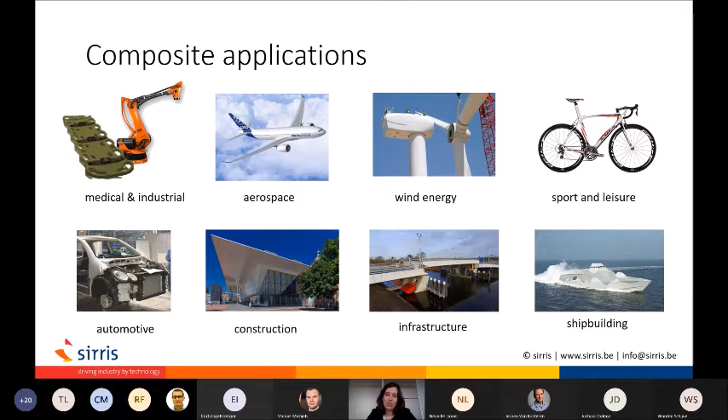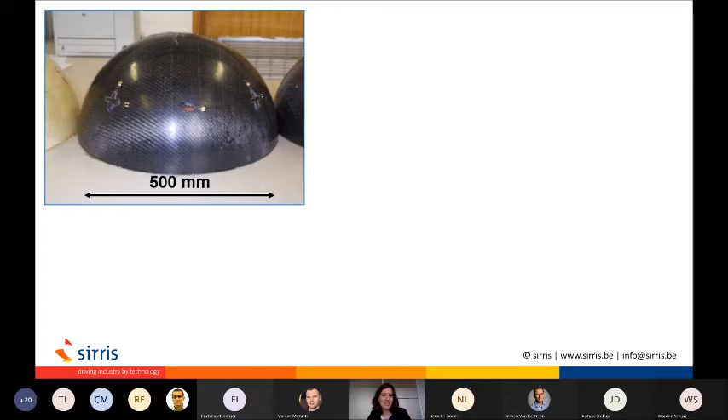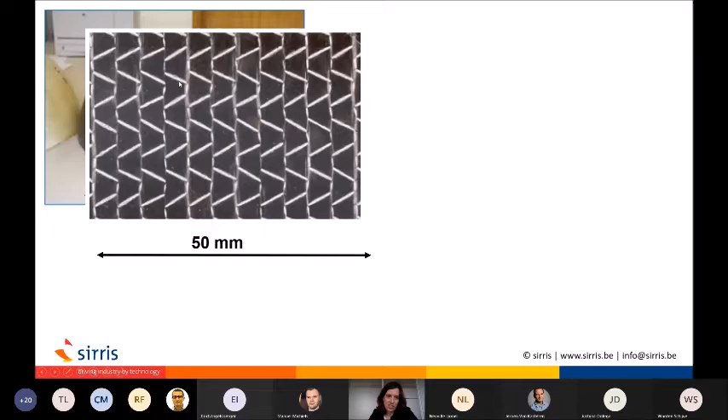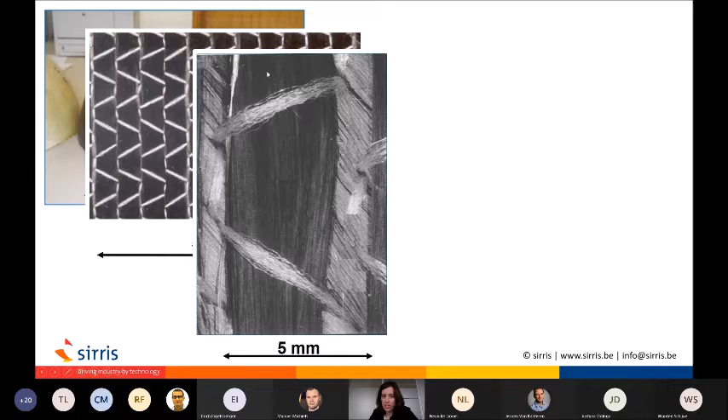Today we want to talk about how these products are made. To explain that a bit more, I want to show a composite to make sure we're all on the same page about what a composite is. This is a composite product. When we zoom in, we have reinforcing fibers - in this case carbon fiber - held together with a stitch. Zooming in even more, we see the carbon fiber again held together with stitching, just to keep it together and make sure the fibers are well aligned. So all the structural load is carried by the unidirectional carbon in this case.

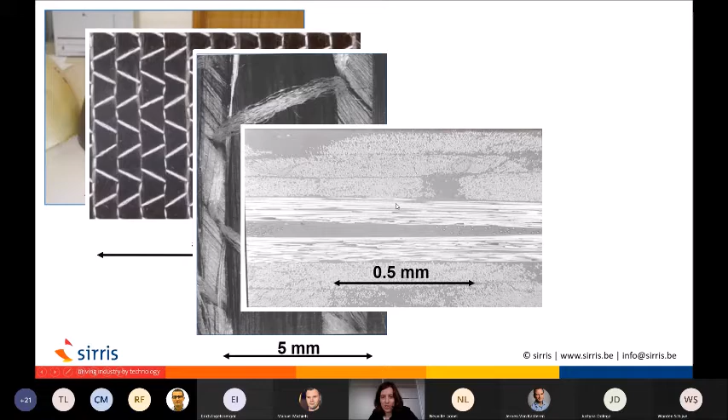When you cut the composite and look at the cross section, you see all the fibers - these appear as circles because we're looking at cross sections. You can see fiber bundles in several directions: this fiber is at 90 degrees on the screen, and this one is along the screen surface, so this is a zero-degree direction fiber.

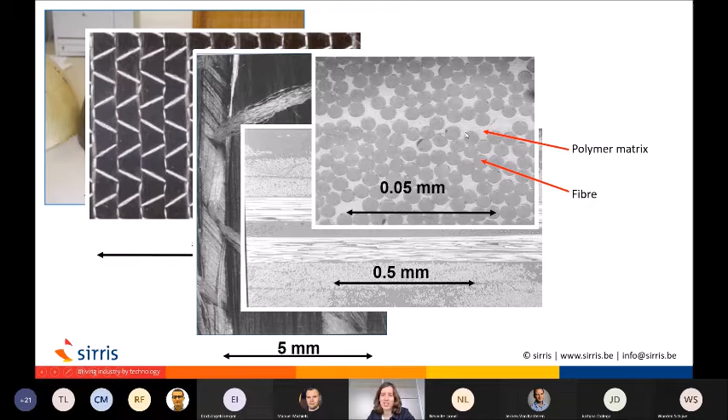But basically, when we talk about composites, we're talking about a blend of a polymer, which needs to be very close to the fiber, with no porosity next to it. This is very important when we start talking about manufacturing. The quality of a composite is mainly driven by the amount of impregnation of the fiber - meaning we don't want any porosity inside the composite. We want the polymer to be very much around the fiber so we can have good load transfer between the fiber and the polymer, and between fibers. That is our goal - to manufacture good composites. How do we do that?

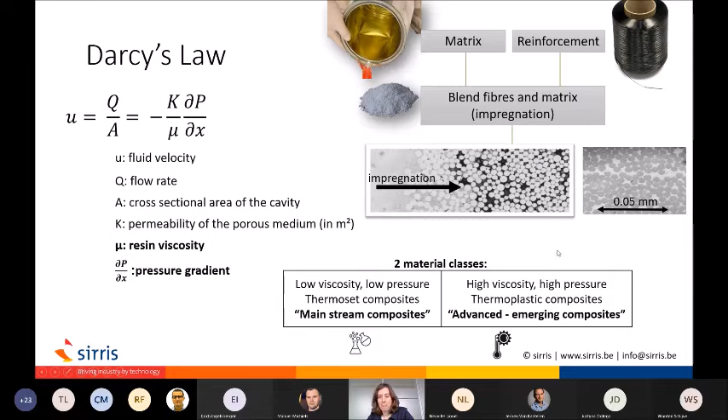When we look at what is happening today, we see more and more advanced composites where you have high viscosity, high pressure. You also need high temperature for these kind of processes. So it's good to keep this in mind as I go further.

We have material classes within composites: thermosets, where we have very fluid resins. We have an initial very low viscosity. During processing, this viscosity will rise in order to get a rigid structure. But initially we need low, mostly low, pressure, though there are also processes with higher pressures.

Curing needs time. That is one of the main drawbacks of thermosets. Once it's impregnated, you still need time for the chemical reaction to go forward. But once the material is fixed, you cannot post-shape it, so that's a drawback. It's also relatively brittle, and these drawbacks lead to more interest in thermoplastic processing at the moment.

It's more difficult to process, but the products in general have very nice opportunities that a thermoset composite doesn't have. I mainly talk about fast processing - you can process this material very fastly if you have the right pressures. Of course, it's a bit more challenging, but you can go to fast processing.

This is why thermoplastics are very much used in automotive industry today. You can also, after your part is made, weld it again. You can assemble parts quite easily - technologies are emerging for that. And the material is typically tougher. This is also very interesting for many applications.

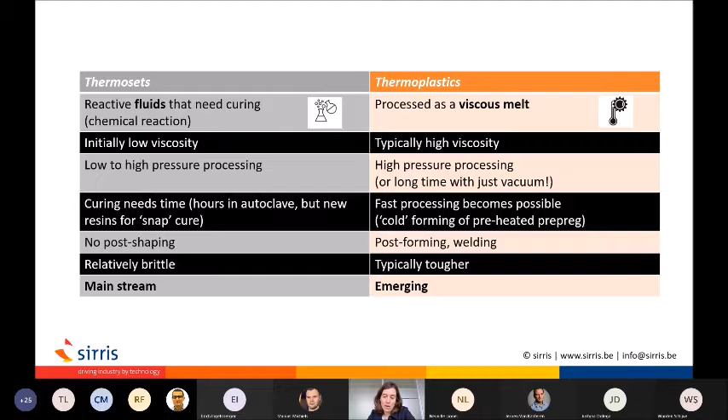Okay, but if we go to the mainstream, I'll start from the start, and during my presentation I will expand a bit more on what is being done today more and more. So I will go towards the trends in composites manufacturing.

One of the first technologies was hand layup. This is liquid molding: you have the liquid resin that you put on the fibers, you roll it and you cure it. Very manual and labor intensive.

The technology used for boats, for example, is vacuum infusion - very similar, but you close the mold with a bag and pull vacuum on one side, and on the other side the resin is used to impregnate the fibers. These are dry fibers in the mold. You end up with very large structures: boats, wind turbine blades, etc.

Then the more advanced liquid molding process is high pressure RTM, or RTM, where you have a closed mold - a double-sided mold - where you inject the resin with quite high pressure. These composites are used for more high-end applications, for example automotive industry.

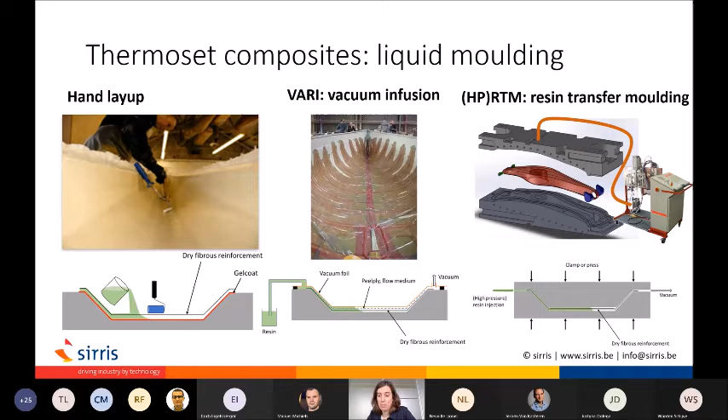Then two other liquid molding processes are filament winding. Here you see a tank that was developed quite recently - it has a diameter of 15 meters and more than 2,000 cubic meters of content. So this is a huge structure, made with filament winding: you wind the fiber, which is already impregnated through a resin bath. But of course there are also smaller tanks made with this kind of process.

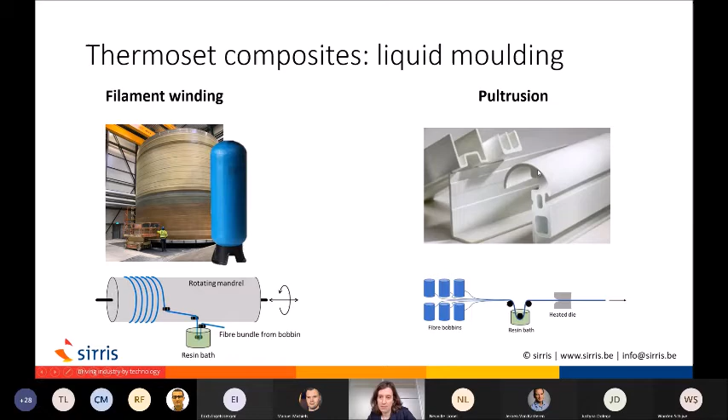A variant is pultrusion, where you pull a fiber through a resin bath and impregnate it to make profiles like this.

A very nice emerging technology that we see is using these mainstream technologies that have been around for many years, but using thermoplastics. So you get all the advantages of a thermoplastic composite, but you can still use mainstream technologies, like, for example, pultrusion.

This is an example by CQFD Composites. Basically, you start from monomers which are combined in a mold or die. In that die, there is a chemical reaction making a thermoplastic composite. Afterwards, you can form this thermoplastic again, or weld it to another structure, for example by applying heat to the thermoplastic composites.

This technology is also used for boats, for example. This is also in situ polymerization, where you again start from monomers and mix them together. Because it's still a monomer, it's very fluid, and you can impregnate a boat or a wind turbine blade, and this has some advantages over thermoset composites.

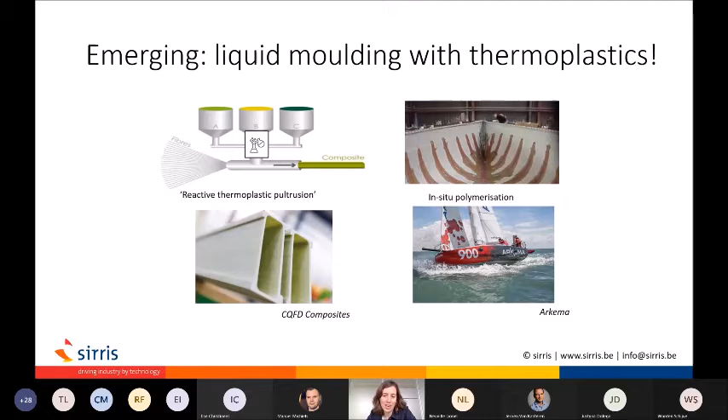Okay, so here I stop. This was about the mainstream composites. Now I want to go a step further to explain what is going on today in industry.

We see that today there is most of the time not one process anymore, but the process is divided into two separate processes. We talked about impregnation at the beginning of the presentation. This is mainly done now separately from the forming of composite products.

That means you not only have fibers and resins on the market, but a whole range of impregnated semi-finished products that can be used to make a formed product. These semi-finished products also have different properties. The one that has been around for a long time is LFT pellets for injection molding.

What has also been around for a number of years is consolidated sheets. These are sheets, many times with fibers woven in two directions into a new structure. And what is emerging more and more is the use of tapes and towpregs. I will come back to that later to see what kind of technologies are needed for that.

So these are used for forming processes from high to low pressures. As you might know, in aerospace, these kinds of semi-finished products have been around for a long time actually. But these semi-finished products, prepregs we call them, needed to be used in an autoclave.

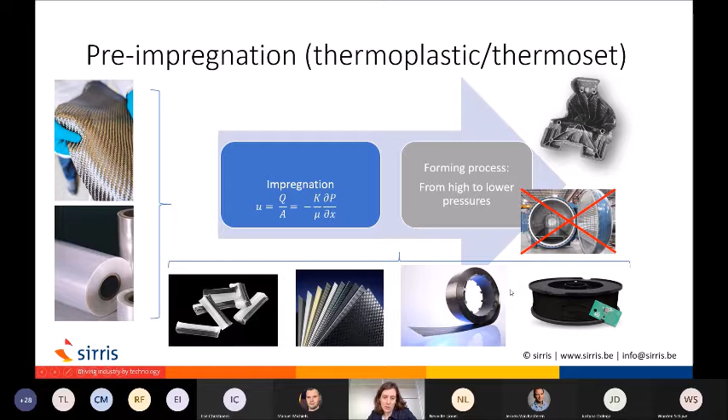So I will start from this kind of semi-finished product, and then we will go and look more and more at the technologies that exist for tapes and for towpregs as well. But let's start with the flat sheets.

This is what is used in automotive, for example. And I think if I click on this, you will not see my screen, so I have to, sorry, I will need to stop sharing for a minute, and I will share again so you can see the movie.

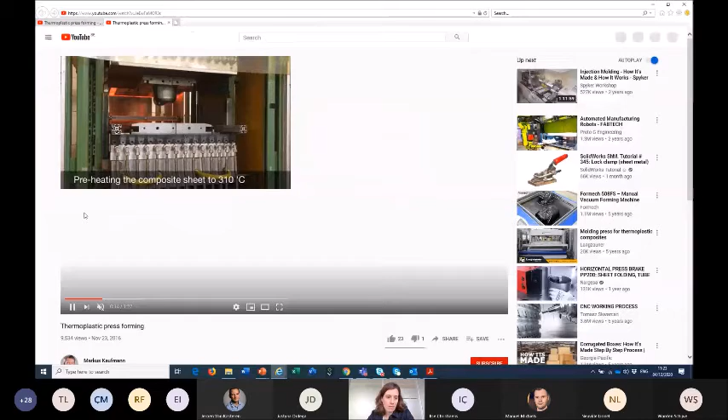Voila. Okay, so this process describes the press forming of thermoplastic composites. It's a two-step process. First you do a preheating under infrared heating.

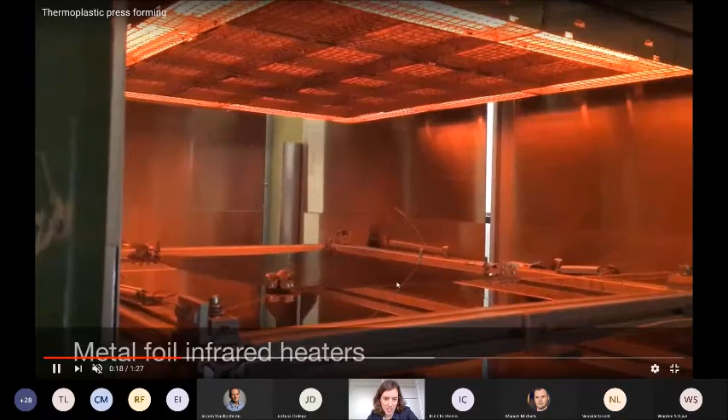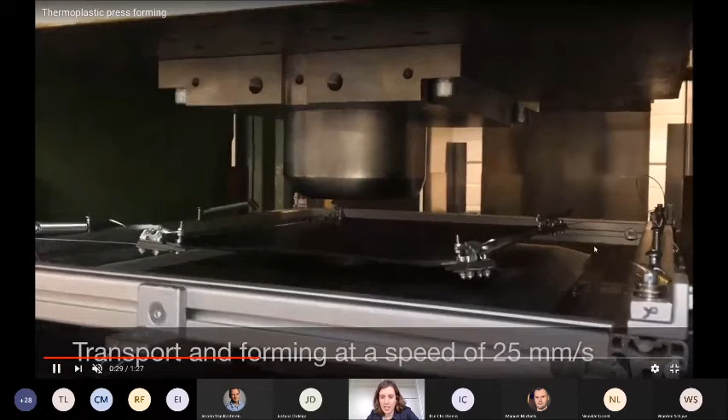Here you see the thermoplastic sheets, which is clamped. This is also a lab scale test, by the way, with a very versatile clamping unit. There's a transportation to the press, and then the press is closed.

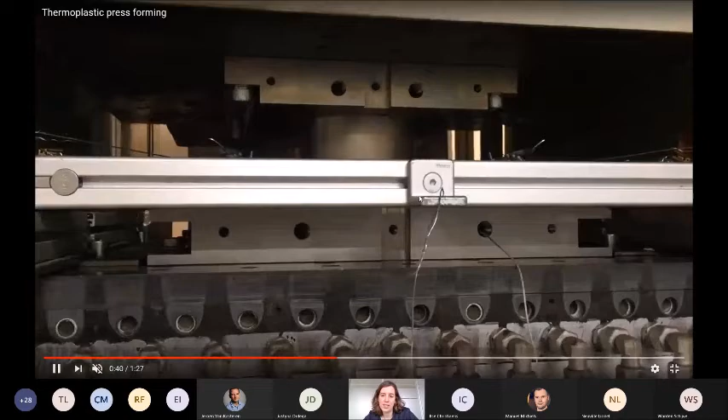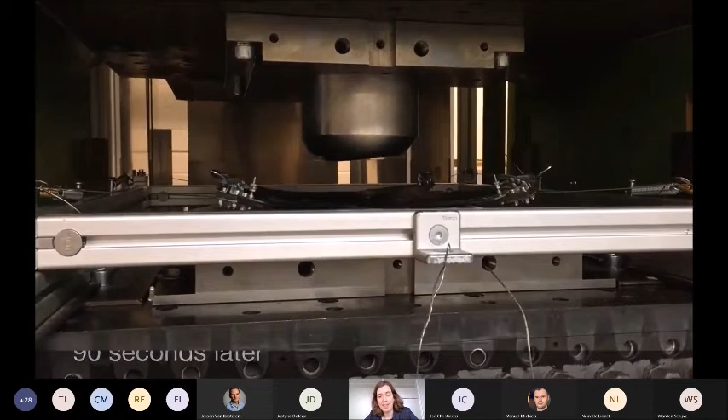And since the material is melted completely, it can form quite easily into the shape that we want. Cycle times for this kind of process are around 2 minutes, 1 minute. So it's quite a fast process.

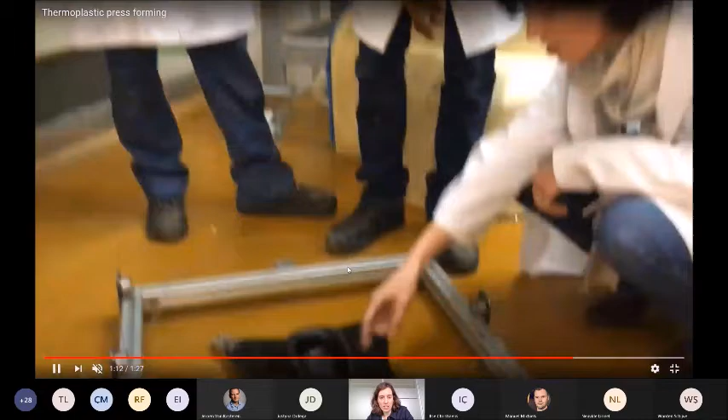And then we demold. It is possible to make these kinds of products net shape. You can see here in the video, this was not yet the case, so basically what we would need to do is to trim the product afterwards.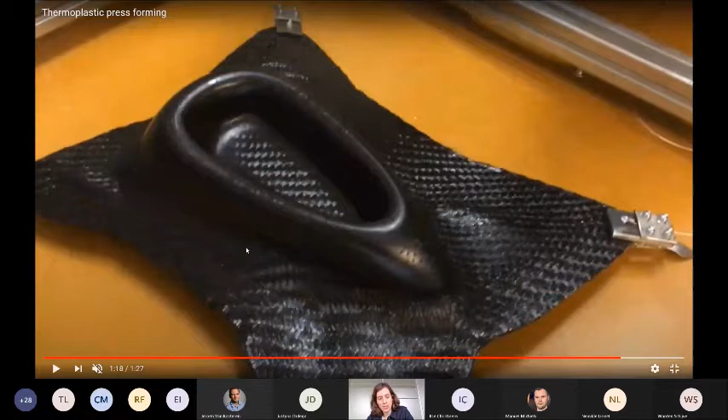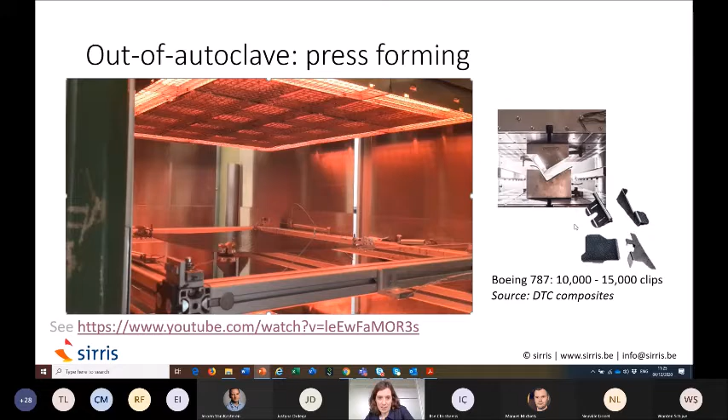Some examples of this kind of process are used by Boeing already, these kind of clips. And then the next emerging technology is using patches of UDs.

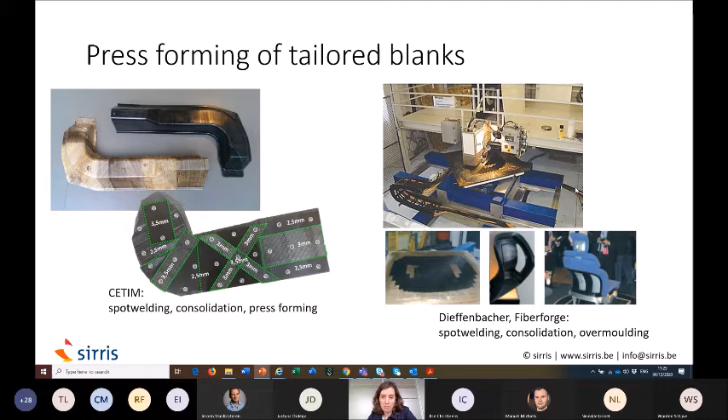So you actually make a patch where you spot weld UDs on top of each other. They are consolidated, and then you use the same kind of process as I have just shown you, press forming, into all kinds of products. This is an example from Cetim; Dieffenbacher and Fiberforge are also very strong in this.

In the next step, we can also overmold. This even goes a step further. Here you see an example where you can see the composite, which is overmolded with white thermoplastic. So this is injection molding over your thermoplastic sheet that was used as a semi-finished product.

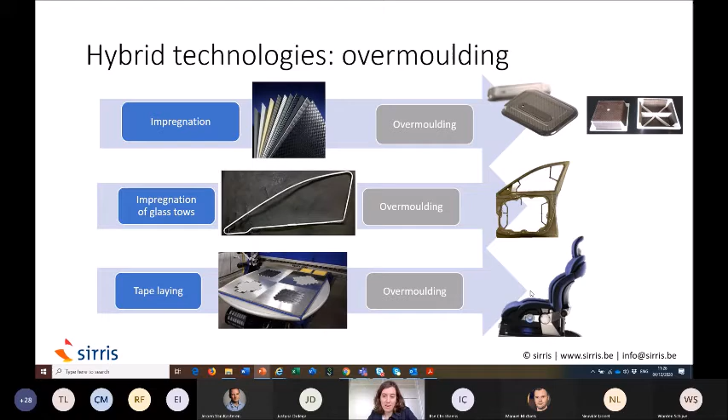You can also use a tow-preg which is overmolded, or you can use the sheets that we saw in the previous slides that is overmolded. This is a very interesting technology at the moment.

Going even one step further, you can not only spot weld, as we saw in the previous slide, where you just weld the tapes on top of each other at specific spots, but you can also use a continuous process, where you very locally weld the tape on the previous stack, and you can do that for a flat structure or for wound structures.

Here are some examples from commercial players at the moment making this kind of tape laying, as we call it. This is fully out of autoclave. You don't need high pressures, because it's very local. You need a fairly small force that can be applied by a robot, and you can apply the high temperature through laser radiation, for example.

So this is used for tanks, hydrogen tanks for example, that can withstand a pressure of around 700 bars, can be made with this kind of technology.

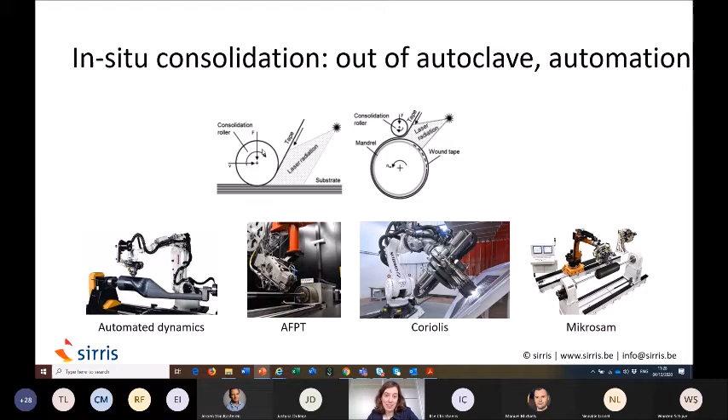And then going one step further, because this comes very close to 3D printing. That is actually what is done in recent years very intensively. These are all companies that started around 2013 or later, so these are recent small companies exploring how to 3D print continuous fibers.

This was the first one on the market, Markforged. But there are other examples. Stratasys, they don't use a continuous fiber, but they use a chopped fiber. This is a very interesting company. They use a thermoset resin, embed the fiber with this resin, and then UV cure. The interesting thing is that they can also include wires and all kinds of sensors.

Arevo, they make bikes with 3D printed composites. So they use a towpreg, which is impregnated, and they make all kinds of geometries with that. Very nice.

Example from Anisoprint. This is a part that was traditionally made in aluminum. They changed to a composite-centric structure, and now they are redesigning that with topology optimization, so you only use your material where you actually need it in your parts. This is very interesting technology.

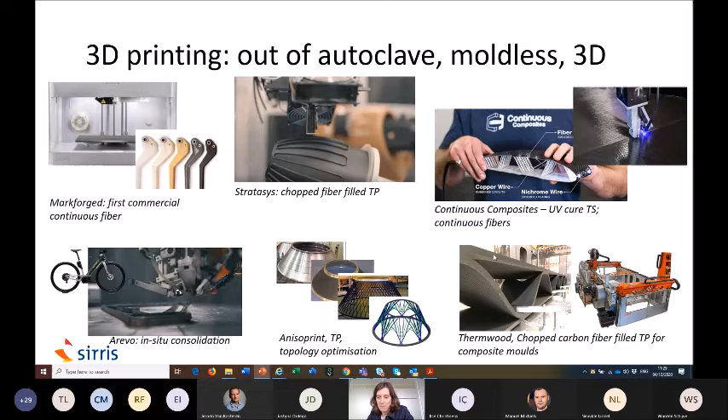This is Thermwood. This is at a larger scale, I would say, for making molds. This is the mold for a helicopter blade. Very interesting technology. I see that my time is almost over, so I will speed up a bit.

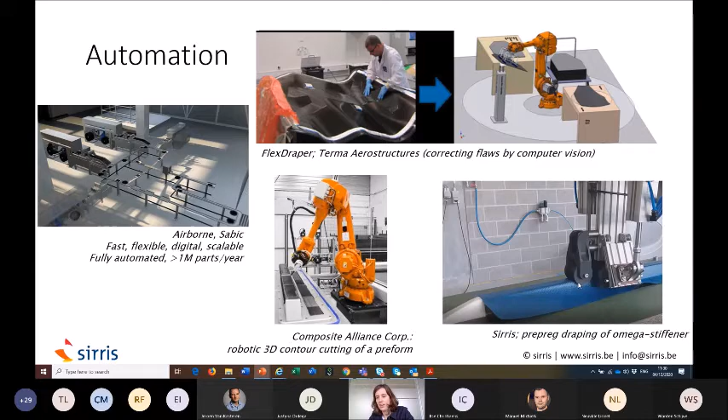One of the very important trends, of course, is automation. Nice example, where they have a fully automated pilot line for more than 1 million parts per year. We see a lot of interest in draping technologies, fully automated, and cutting technologies, also fully automated. This is a demonstrator that we have done at Sirris, making omega stiffeners fully automated.

And then, of course, we go in the direction of digital twin. On the one hand, simulating processes. More and more, this is done quite accurately. I started 7 years ago working with Aniform, simulating fiber directions during the process, and we see that over the course of these years, simulation programs have improved very much, so you can predict fiber directions and thickness of composites.

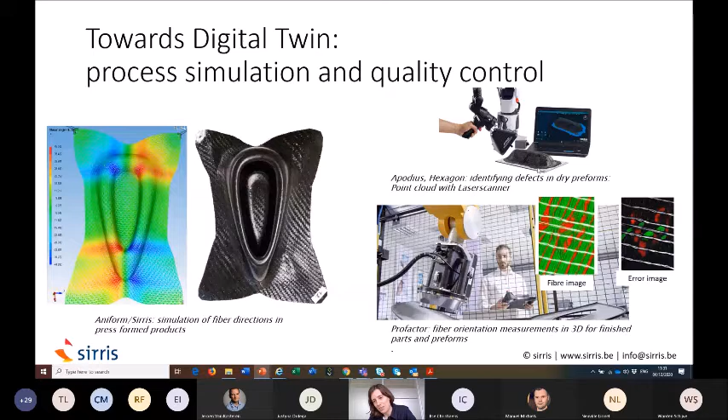On the other hand, we have a lot of technologies emerging on quality control. It's really seeing where the fiber is in your products after manufacturing. There are several technologies available.

One other emerging technology is incorporating sensors, fiber Bragg sensors, capacitive sensors. This was a project done together with the University of Ghent, where we looked at the infusion strategy for RTM products, and with the fiber Bragg readings you can very nicely see where the resin is at a certain time, and you can also monitor the cure of your product very well.

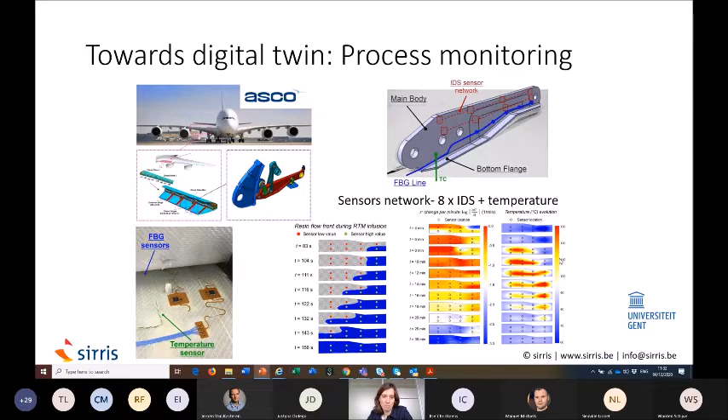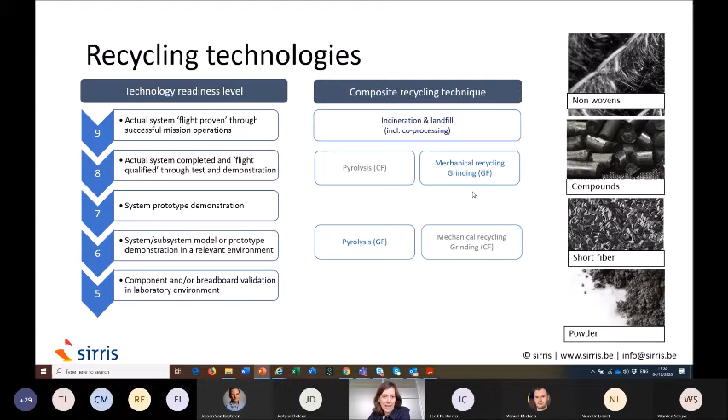And then the last technology I wanted to talk about is recycling technologies. They are also emerging very much, and I just want to leave at least a bit of space for questions.

In summary, what we see is that more and more technologies are being combined into hybrid technologies. We see multifunctional materials, embedding of sensors inside of your composite parts. Recycling technologies have evolved very much in the last few years, and there's a lot of effort going on in that field.

Working towards digital twin, so process simulation and in situ inspection of the quality of composite parts, is also one of the trends. Going towards fully automated fabrication and tool-less manufacturing is possible with 3D printing, where we expect a lot of emerging technologies in the next few years.

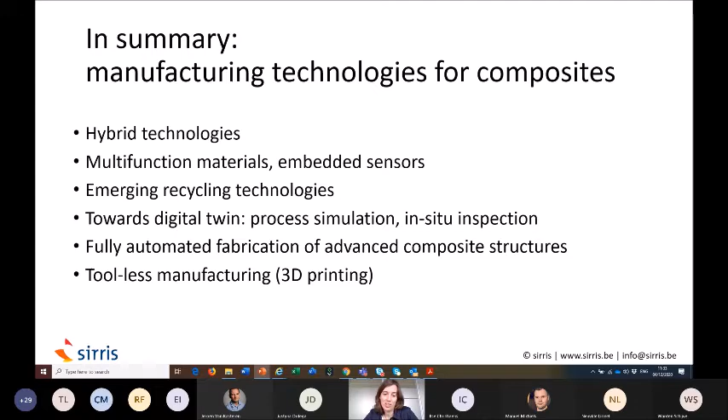Okay, I will leave it at that. Thank you very much for your attention, and please ask me any questions if you have them.

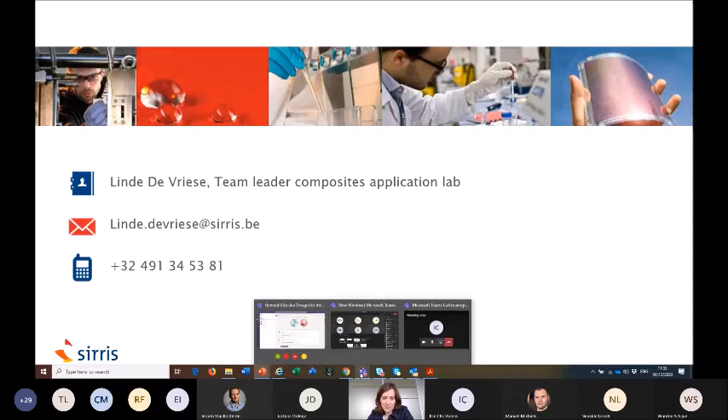Thank you, Linde. That was a very nice one. We have an echo at the moment.

We have a question from Luc: you mentioned high pressure injection of the resin, Linde. What injection pumps do you have for this? Maybe a recommendation of a brand or a manufacturer? For RTM, we work with Wolfangel, but there are other suppliers available. It really depends on the quality you want in the end product. You have RTM at low pressures and high pressure RTM at higher pressures, but there are many suppliers that can provide this.

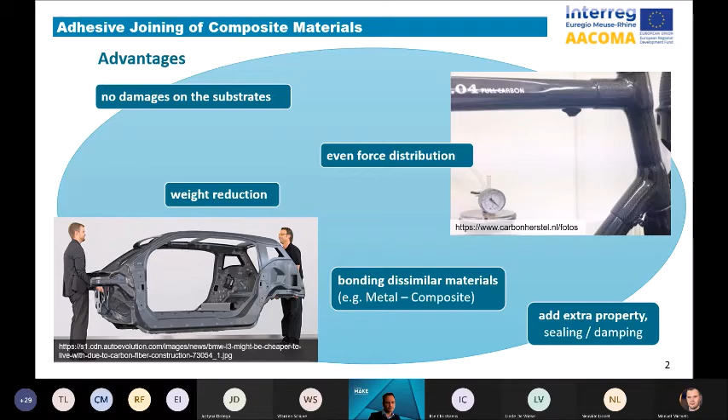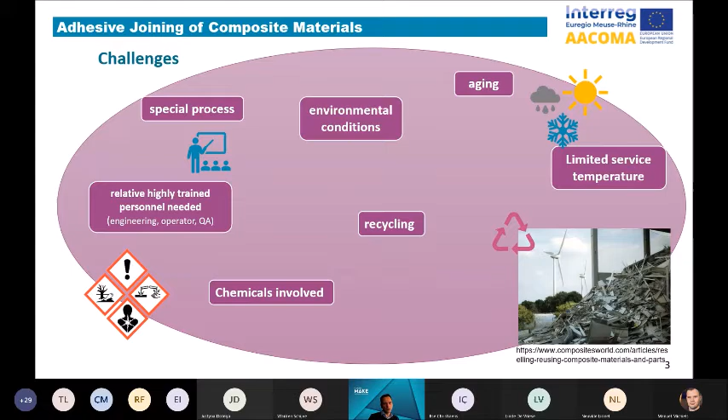To make use of the benefits and to deal with the challenges, we have a predefined path to design your product and process that will help achieve a reliable adhesive bond. I've defined 6 steps for setting up an adhesive bond, and I will go through these 6 steps very briefly.

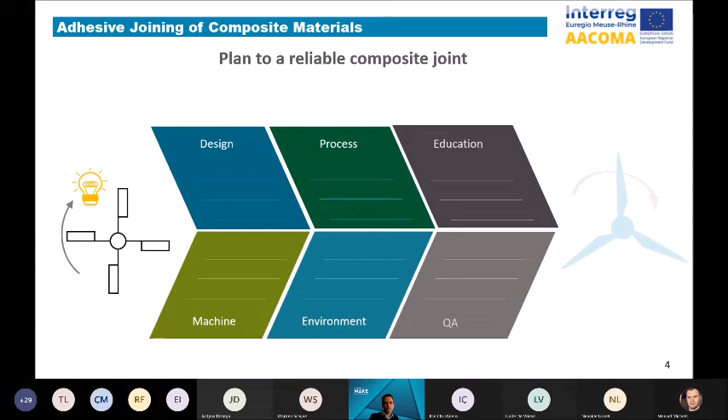The first and obvious step is to make your design, as in choosing your substrates, the adhesive, and the design of the bond line. In most cases, the substrates are a given fact. They are made out of fibers. This can be carbon, glass, or natural material. But in the end, you will bond on the matrix, as a thermoset or a thermoplastic.

In general, a thermoset is easier to bond compared to thermoplastics, since thermoplastics have in general a lower surface energy, especially polyprop, which is very difficult to bond.

The opposite substrate can be the same type of composite, or typically a metal construction, or for instance glass like a windshield. Each type of composite and combination of substrates results in different requirements and a different kind of adhesive. For instance, bonding a windshield to a composite body has completely different requirements compared to a composite car body to a metal structure. The windshield bonding needs to be strong and flexible to absorb movements due to expansion and dynamic loads, while the bonding to the metal structure needs to be very rigid for better drive control.

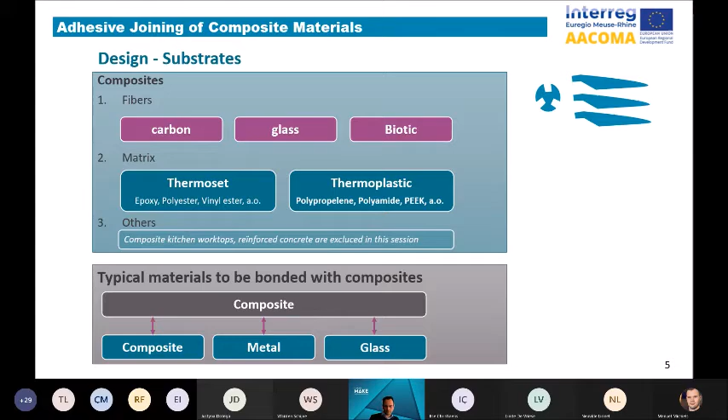Then the adhesive selection. In the adhesive selection we have requirements for the design properties, with bonding strength, allowed elongation, and temperature resistance as the most common selection criteria. But also for the process we have some criteria, and the most common are viscosity, pot life, and the curing time and temperature. Curing temperature is a typical criterion for selecting a suitable adhesive.

For structural bonding, epoxy is the most used adhesive. It has high strength on various materials, is good temperature resistant, and has good properties against aging. But when you can't guarantee an even and very thin bond line, epoxy loses quite some strength, and polyurethane and MMA adhesives may be the better choice.

For non-structural adhesives, sealant types such as an MS polymer or one component polyurethane can be chosen for their excellent sealing and damping properties. Maybe you can also think about a PSA, a pressure sensitive adhesive, or just a tape, for very quick adhesion on smooth surfaces. This can be very interesting.

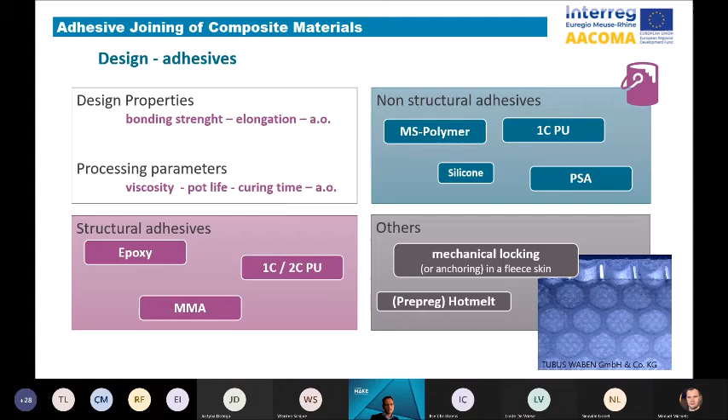Simultaneously with the adhesive selection, you have to design the bond line. Please design the bond line to absorb tensile, compression, or shear forces and avoid peel forces. These peel forces cause very high peak forces, and the joint cannot withstand them. In a good design, you prevent exposure of the bond to UV or ingress of water and chemicals. Preventing this will lower the influence of aging and thus enlarge the lifetime.

The design of the bond line depends on the type of substrates, adhesives, and the type of application. A thin bond line is used for rigid structural joints, and a thicker bond line can absorb movements and can also absorb tolerances in the substrates, in the composites.

When the materials and the geometry are defined, testing the adhesive bond is highly recommended. Testing can be done on coupon samples or on real models. The testing is normally done in combination with accelerated aging cycles to test durability, and which cycles you choose depends on the outcome of a risk analysis. Testing can typically be done in 1 week or maybe up to 5,000 hours.

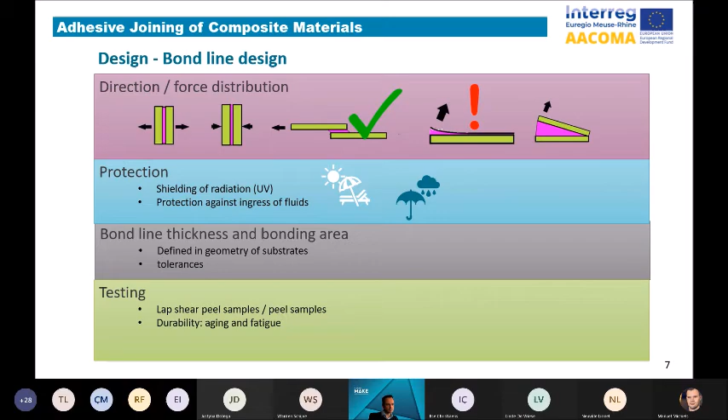After finalizing your design, the next step is how to process your bonding. What is the optimum method to prepare the bonding surface? How can the adhesives be prepared and applied? And how do you ensure the correct bond line thickness?

For your treatment of the substrates, a proper treatment of the substrate is often underestimated. I dare to state that more than 80% of bonding failures have a wrong surface treatment as the root cause. In many cases, the finger is pointed at the adhesive supplier, but the quality of the adhesive itself is rarely the root cause.

But whatever the treatment will be, the first step is cleaning, and the chosen cleaning solvent needs to be able to remove all contaminations but not damage your material.

Release agents are often present at composites, and they can be very difficult to remove. Even silicone products are still used as release agents, and it's virtually impossible to remove or cover all silicones. You really have to state that these materials are forbidden in your production or at your supplier.

By cleaning, thermoplastics are more sensitive to solvents compared to thermoset materials. The cleaning agent or solvent can create stress cracks or dissolve the material. So your cleaning agent has to be selected for this.

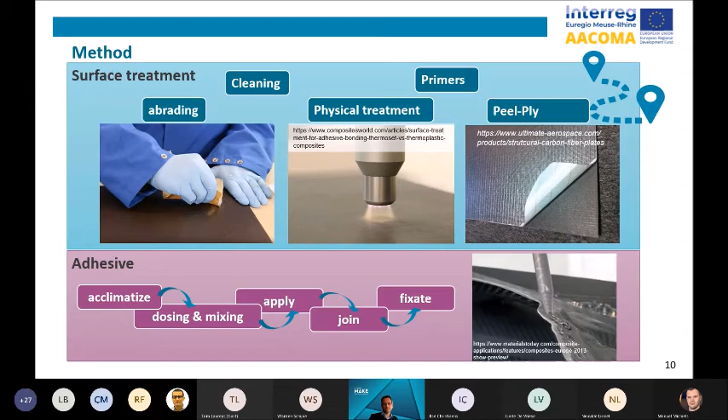Simultaneously to defining the methods for applying adhesive, the degree of automation can be defined. Each step can be automated on different levels, from simple tools for mixing to fully automated and controlled metering and mixing systems.

This can also be extended with automated applying and fixation. The benefits of automated production are not only the cost and shortened production times, but also the constant quality, and eliminating exposure to hazardous materials are also important benefits. But in the end, the grade of automation is mainly dependent on the size and quantities of the assembly.

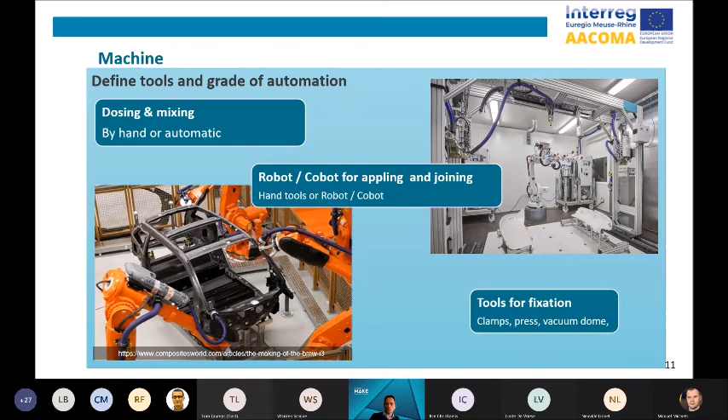When you have defined your method, extra attention has to be paid to quality assurance. Adhesive bonding is a special process where you can't judge the critical quality requirements without destructive testing, so you have to build your quality into your process.

Important items to be defined are what data needs to be recorded. All the relevant data which can affect the joint is recorded, such as the room temperature and humidity, the batch of the used adhesive and primers, and the different timings of the begin and end of a process step.

Normally each bonded part must be traceable to this data, so each bonded part has its batch or serial number for tracing. The batch size is part of your risk analysis, it's up to you to define what you call a batch.

It's possible to define a batch size as the bonded parts of a month of production, but when a non-conformity is reported in the field, this complete batch has to be isolated and inspected. When you define a single product as a batch, you will have more administration and testing during production, but in case of a non-conformity, you might be able to prove that other batches don't have this issue without further testing.

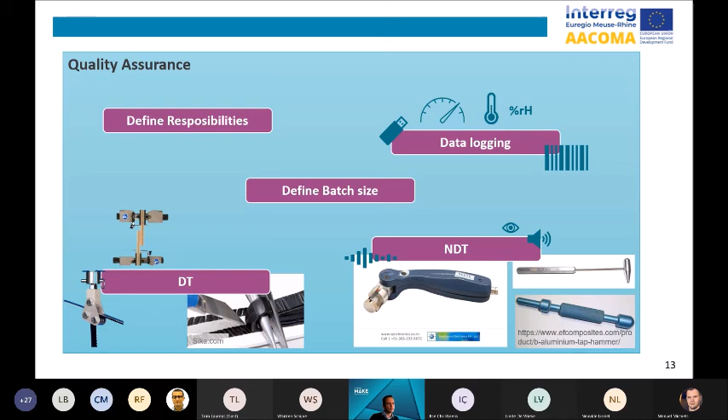Other quality aspects to be defined are who's able and who's responsible for which tasks. Working in a controlled environment may be an obvious step, but it's nevertheless important. Ensure that the environment throughout your process is monitored, with working conditions as defined in the different processes, including the transport and storage of your adhesives, and the operating conditions in terms of temperature and humidity. Pay attention to contamination control and safety regulations regarding health and environment.

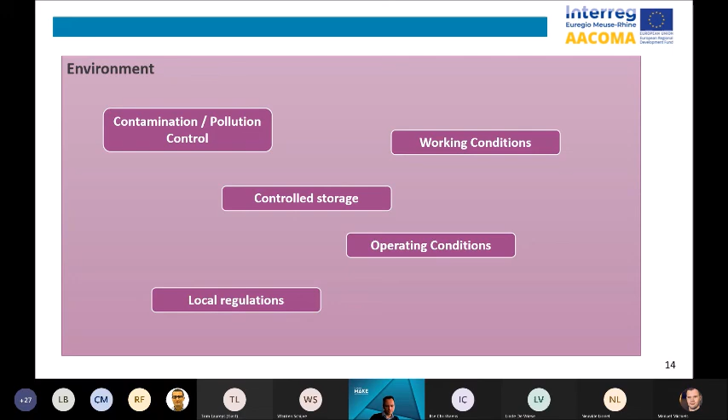All these discussed steps can be taken really well, but in the end the quality is made by the workforce. Therefore you have to train your staff and operators. There are mainly three levels of knowledge bases. You have the adhesive engineer, who is responsible for the high-risk bonds, economically or safety-wise, and who will also do the design and define the process in detail.

You have the adhesive specialist, who is able to take corrective actions on the shop floor and do the quality control. And then you have the adhesive bonder, who has a wide knowledge about adhesive bonding for performing constant quality.

There are different market-specific courses available, but in Europe an industry standard is set up for adhesive bonding. These European diplomas are now worldwide recognized, and the content is assured by the European Welding Federation. These courses are held across Europe, in Belgium at Flanders Make, in Germany, the Netherlands, and in many other countries, even outside Europe.

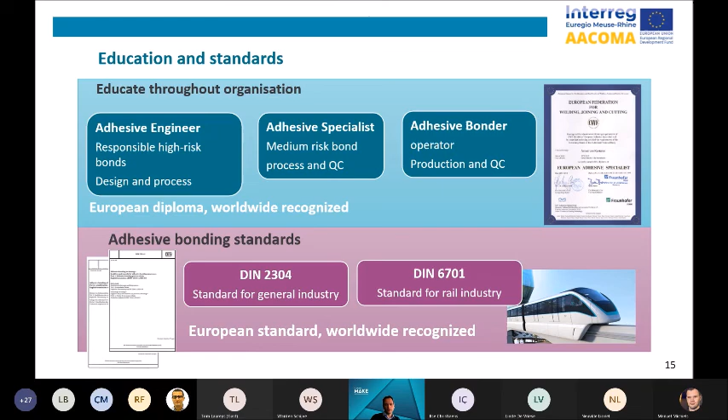To standardize your adhesive bonding activities, two German standards have been introduced in the last 15 years. Both can be seen as an extension of the ISO 9001 quality standard. The DIN 6701 was the first standard, especially developed for the rail industry. This standard was the base for the DIN 2304, which is applicable for industry in general. These standards are a really good tool to help you control your bonding activities.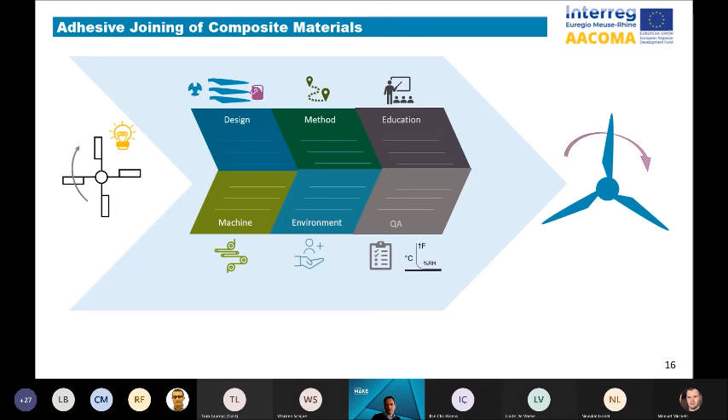I'm coming to the end of my presentation. I hope I've given you a small insight into the steps and points of attention to come to an adhesive joint in composite structures. So if there are any questions, please ask them, and thank you.

Thank you, Jeroen, for the presentation. My main takeaways, what I remember, was the importance of surface treatment and process control, very important. So I learned a lot. Again, thank you.